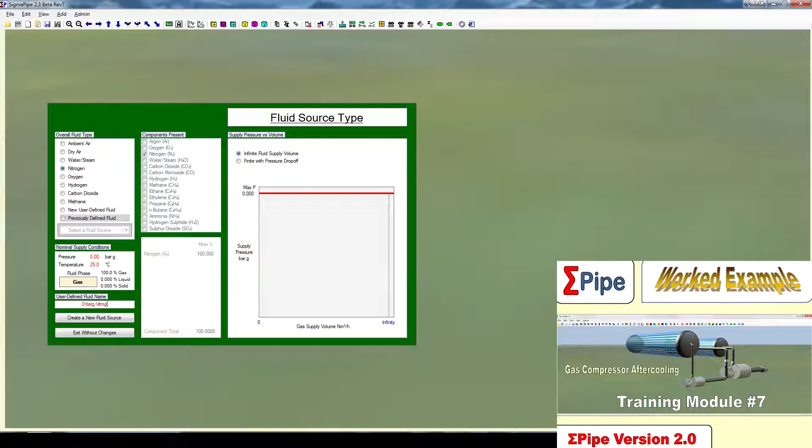So we click up here, our source here is nitrogen at 25 degrees and 0 bar gauge, so I'm going to call that 0 bar gauge nitrogen, and we also want to create our fluid sink. This will be a 16 bar gauge sink. So I'll call it 16 bar gauge sink.

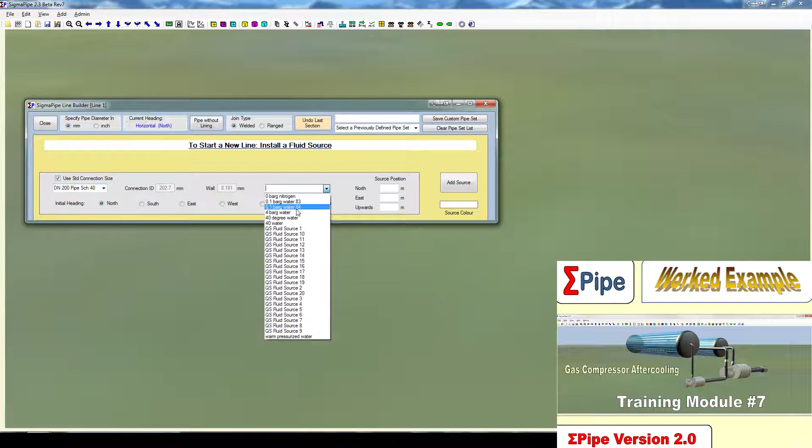Alright, and now we want to create the line itself. So we're going to be using a standard connection size to start off of DN200 schedule 40 pipe. Heading north, and this is our source here, which is the 0 bar gauge nitrogen. I'm going to elevate it by 2 meters just to keep it off the ground.

So to start off, we'll add in a pipe length, and then we've got a compressor. This compressor is going to be the first one. It's going to have DN200 schedule 40 input and output, and we're going to leave our default compression curve and motor efficiencies. The only difference I'm going to change, I'm going to make it 304 stainless as with all of our fittings. So you can see here, the output of this is facing upwards as we want.

And we're now going to put a cone section on to resize it. So the input will be the DN200 schedule 40, and we're going to resize it down to DN100 schedule 40. And we're going to make it 15 centimeters long. And again, the fittings we'll make of stainless.

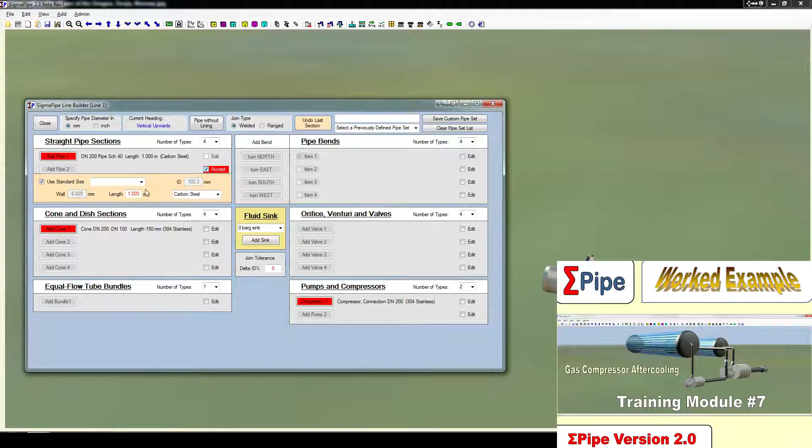And you can see here this pipe has come up red because it's not going to fit because of the resizing. It's not within the tolerances. So we've got to define a new pipe here, which will be of the smaller size. We've now got a bend. This will be a bend to the north. We'll add another meter of pipe, and we want to put in our first heat exchanger.

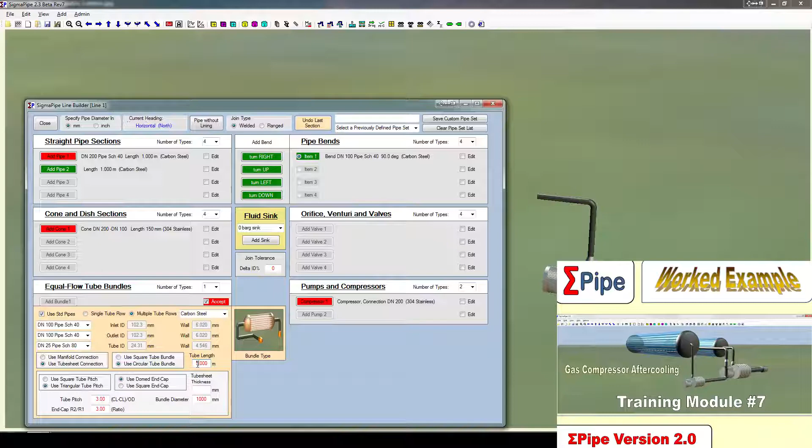This will be defined as follows: multiple tube rows with a tube sheet connection, circular tube bundle, triangular tube pitch, and domed end cap. The diameter of 1 meter, a tube length of 5 meters, and everything else we leave as it is, except we'll make it of stainless. So there we go, we've got that.

And we want to bring the pipe around to the front now. You can see that in the diagram there. So we'll add in a turn left, a meter of pipe, another turn left, and I'll make this 5 meters long to bring it back.

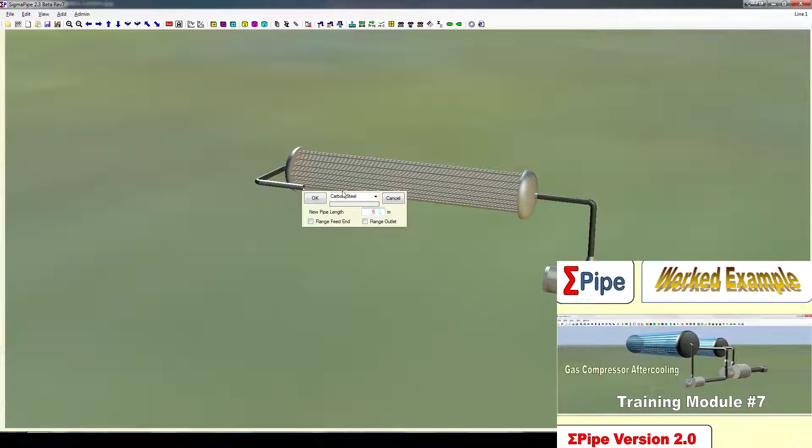And we now want to turn down, meter of pipe, and then we can put in our globe valve here to control the flow. So we'll define our globe valve with the default valve curve, but we're going to start it off 90% open. And again, we'll make this out of stainless. You can see that's the valve curve, it all looks correct.

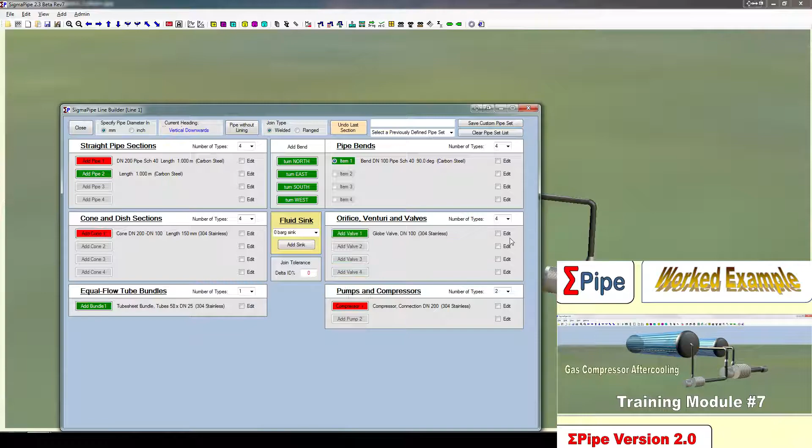So you add that in, and another meter of pipe. There it is. You can see this is a bit long here. I know that's right, I've still got a bit of space above the ground, but I'm still going to resize these a little bit because it's down below the source. I want these to be up a little bit higher, so I'm actually going to make them 1/2 meter each.

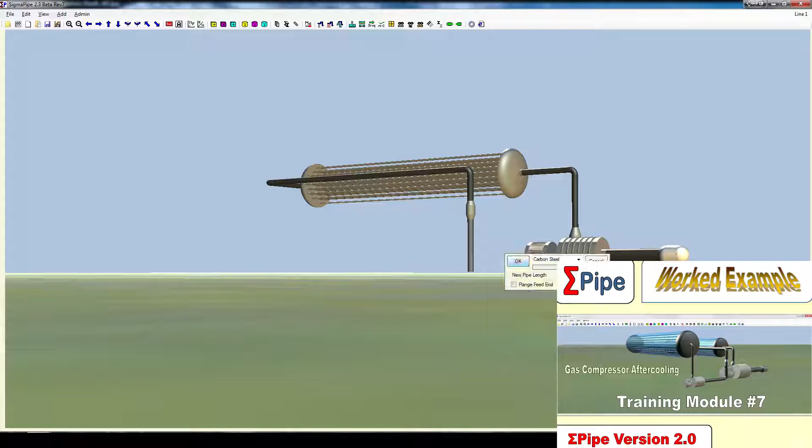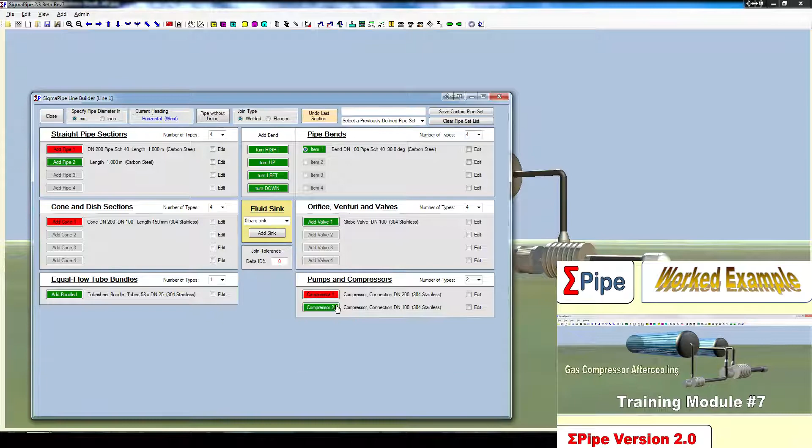Okay, we're now going to turn to the west and add in a pipe length and our second compressor here. So we'll define our second compressor with the default compressor curve made of stainless. And we can see here that the output is off to the side here. As we're recreating that diagram, you can see at the bottom right, we're going to rotate this by 270 degrees to bring that up to the top. There we go.

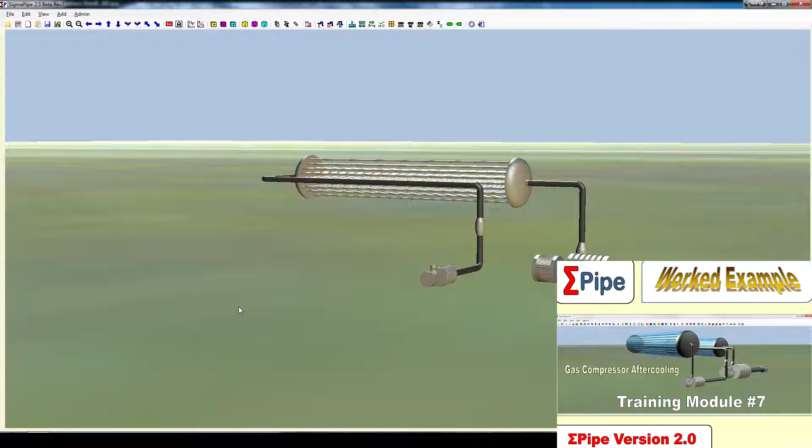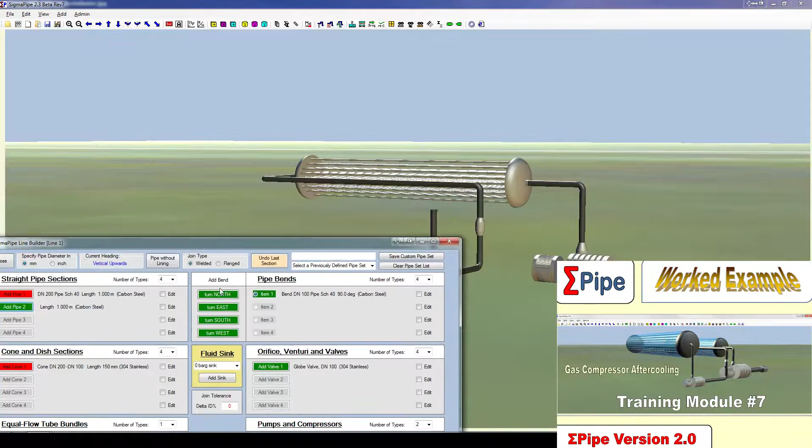And to start off, we don't have the aftercooler. So we're just going to add in a meter of pipe, turn to the north, another meter of pipe, and our 16 bar gauge sink.

The last thing we need is the water cooling on that heat exchanger. So you can click to add it and then edit it as follows. We want it to be exposed to all of the pipes with a box temperature of 30 degrees, 4 bar gauge pressure, and 3 meters per second velocity. So this is all correct.

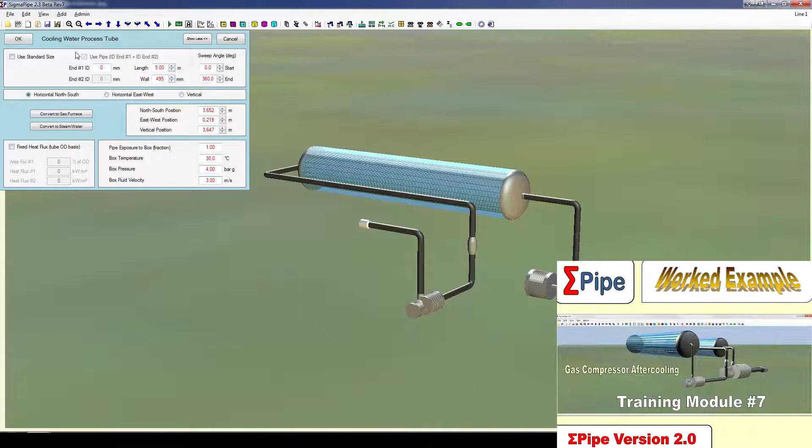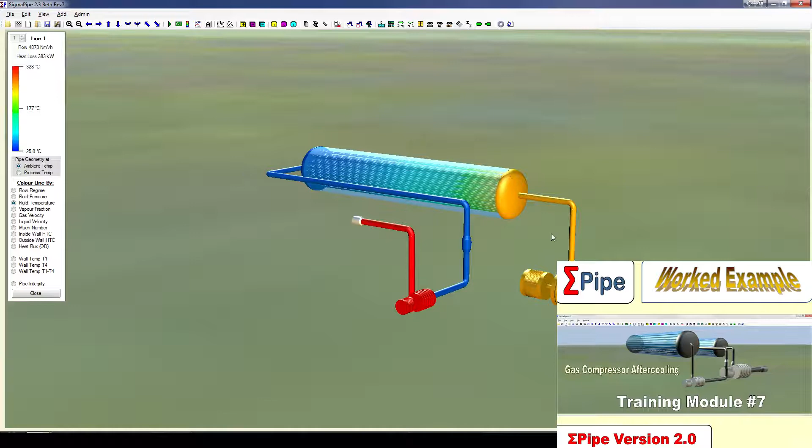We can now solve this system by clicking the play button, and we want to have a look at the temperatures. To start off, we'll note there's a heat loss of 383 kilowatts, and we can click on the fluid temperature on the left hand side here to see, as we expect, it heats up through each of these compressors and it cools down as it's going through the intercooler. And we can look at the results graph if we want some numbers to back this up.

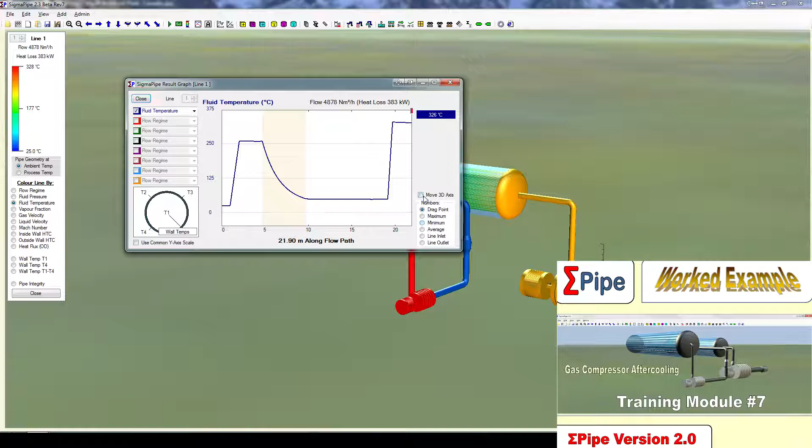By dragging this around, we can see that at the output it's about 326 degrees Celsius. And if we tick the move 3D axis option, we can see exactly where that's occurring, and it's at the end here. It's between 330 and 325 degrees.

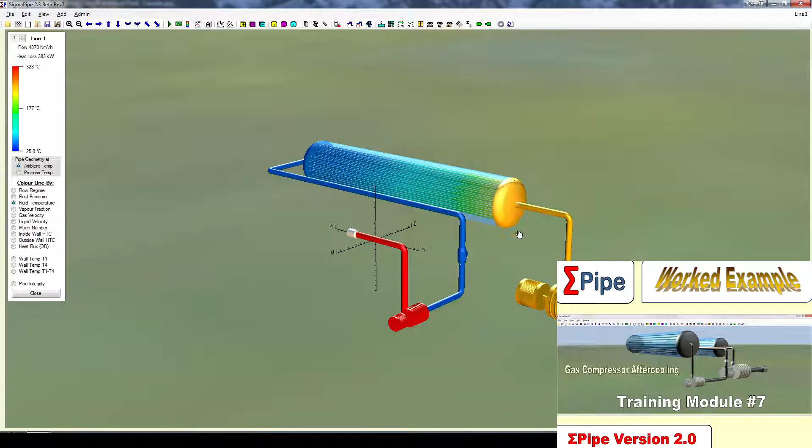So now we can have a look at the effect of another intercooler. So to do this, we can copy it from here and paste it downstream of that pipe length, and there it is. You can see it didn't copy with the water, and that's right, because we're going to start off just by seeing what effect we have when we don't water cool this aftercooler.

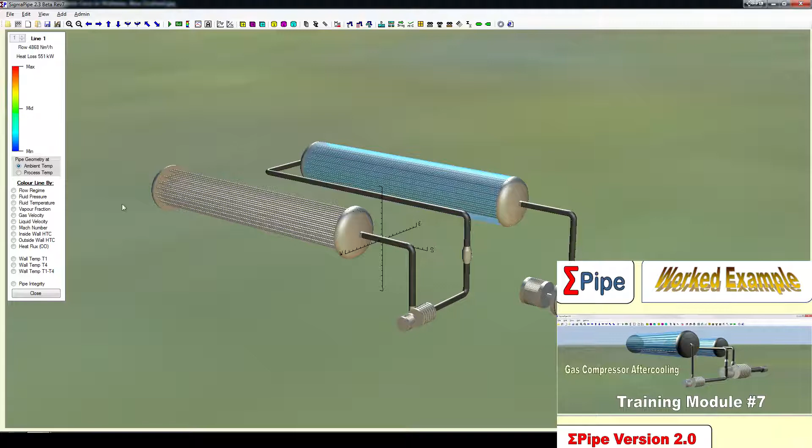So by solving this, we can see that the heat loss is 551 kilowatts, which is higher than the 383 that we got earlier, so that's good. We're losing a little bit more heat, not a huge amount more, but we can look at the fluid temperature. Again, you can see that that cools a little bit down to this yellow region here. And looking at the results graph, we can see that after the second one, it cools down to about 234 degrees. So that's down from 326 originally.

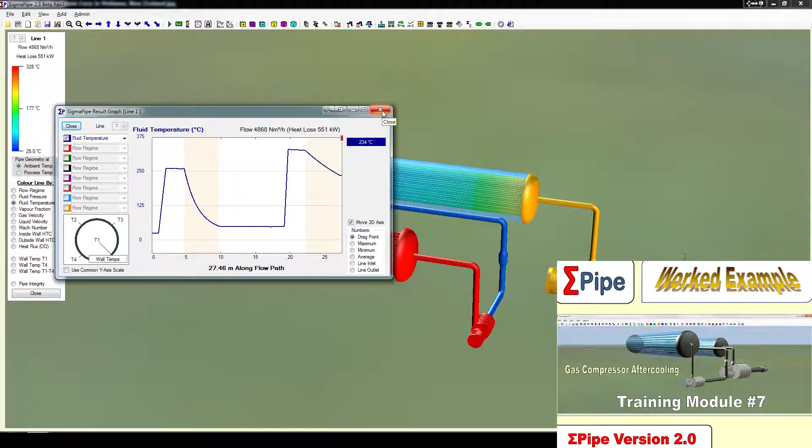However, now we can try it with the water cooling. So we click to add that water cooling jacket, and we're going to leave these as default. That's the same as we had before. We can click play to solve it.

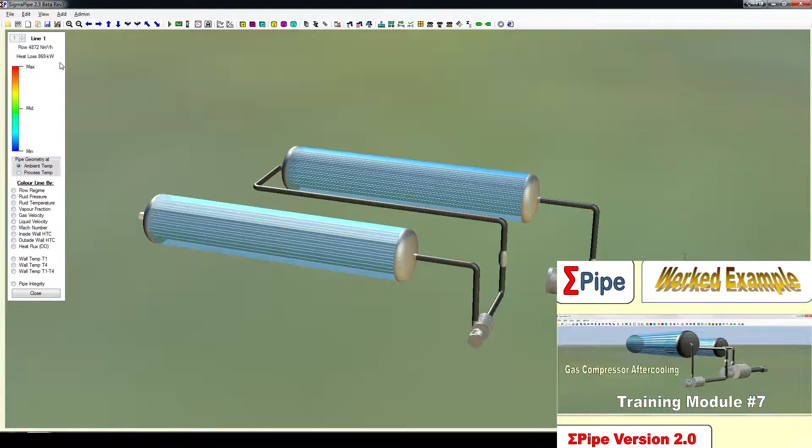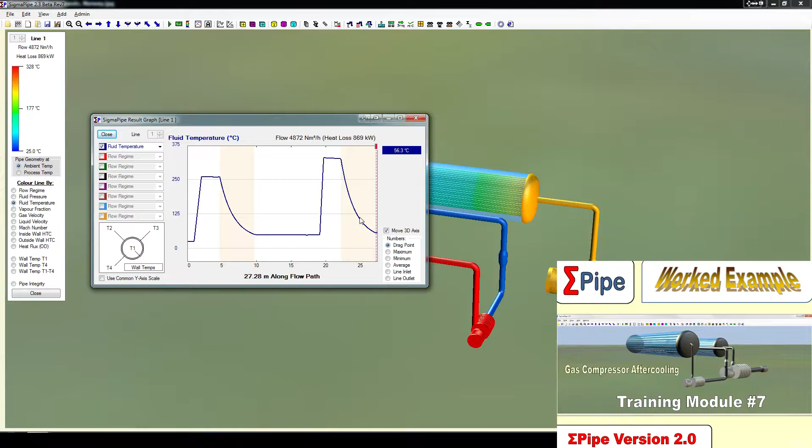Alright, now we find there's a heat loss of 869 kilowatts, which compared to the 303 to start off is a huge amount more. We can have a look at the fluid temperature and see that it gets down to this blue again, and we can look at the results graph to find out what that corresponds to. If we drag it to the end here, we find it's 56.3 degrees. So very different to the initial 328 without the aftercooler, and much better than the 234 that we were getting before. So that's how we can have a look at the effect.